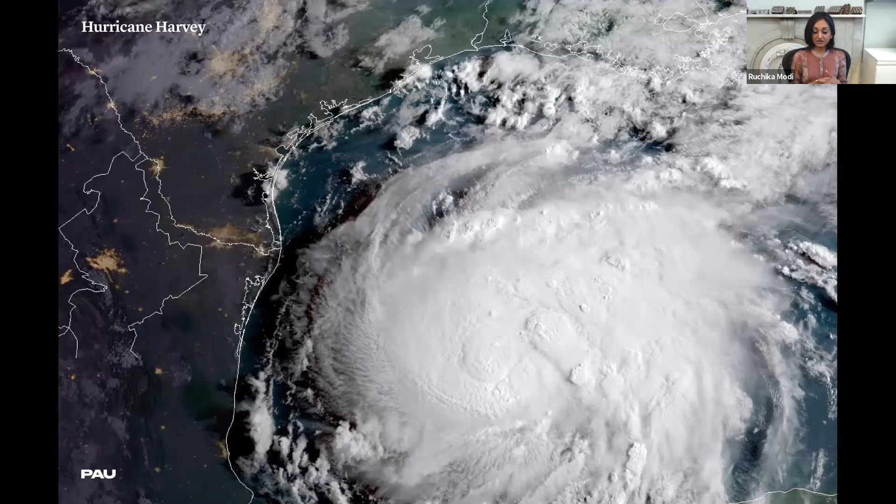Hurricane Harvey was a major storm with extensive rainfall, but it was not a natural disaster. The disaster was caused by planning decisions, or really a lack of planning, to allow for development to occur in a hurricane zone without taking appropriate measures.

Houston, the city with no limits, conveys the promise of boundless opportunity, but it's also the largest US city to have no zoning laws, which is part of a hands-off approach to urban planning that contributed to catastrophic flooding from Hurricane Harvey and left thousands of residents in harm's way.

According to environmentalists and experts in land use and natural disasters, growth that is virtually unchecked, including in flood-prone areas, diminished the land's already limited natural ability to absorb water. And the city's drainage system, a network of reservoirs, bayous, and as a last resort, roads that hold and drain water, was not designed to handle the massive storms that are now increasingly common.

They catastrophically failed to predict the way floodwaters would impact Houston's newest areas of exurban sprawl. In neighborhood after neighborhood, buildings outside the official floodplain but adjacent to water bodies were also inundated, in ways that could have been predicted with a more serious study of how sprawl has brought us to this point.

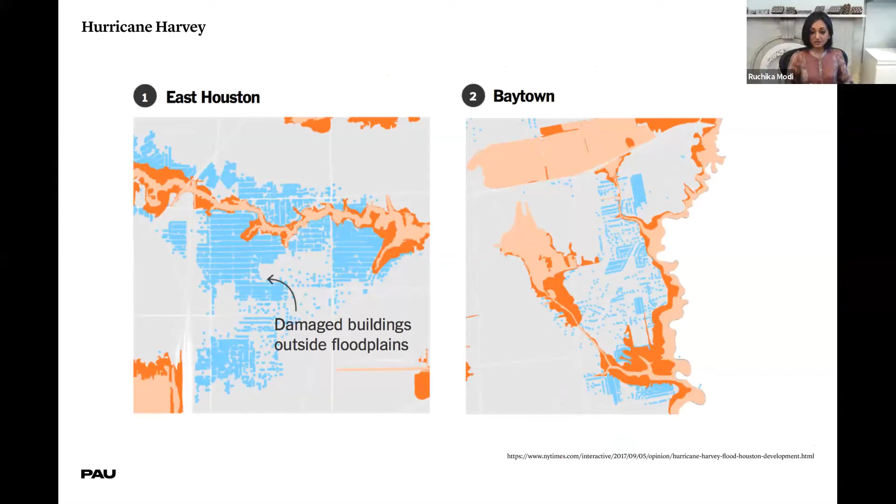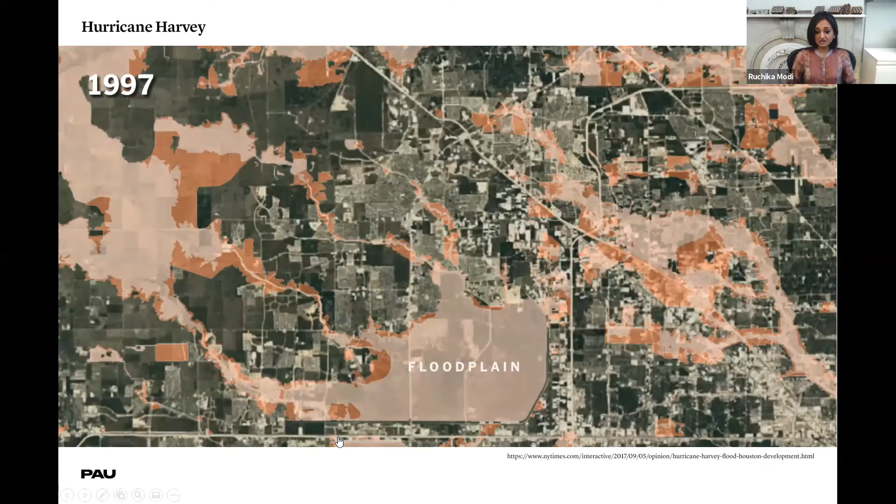This was not a process that happened overnight. This disaster was building in slow motion over the last two decades. Land far outside the city center that would historically not have been considered prime for development was devoured in pursuit of short-term profits. And it was these areas that proved to be some of the most vulnerable.

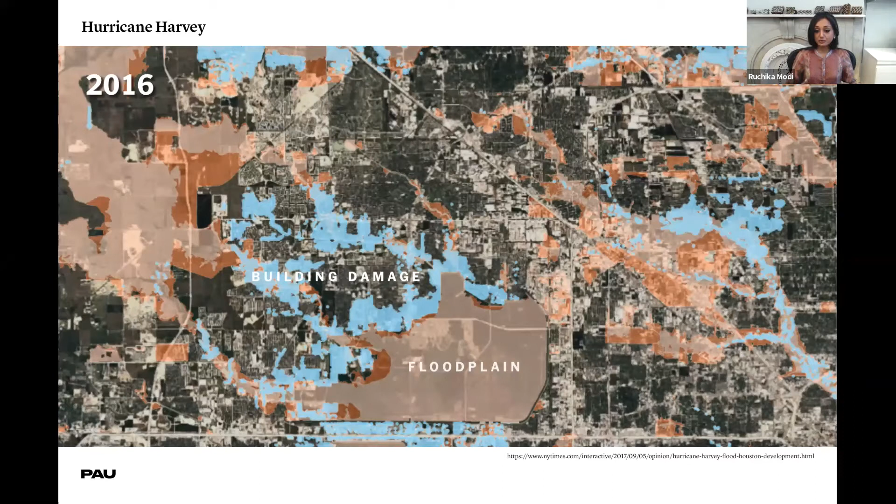So how can we fix this? From a policy perspective, addressing the relationship between climate change and the built environment would take more than band-aid solutions and cleaning up after the fact.

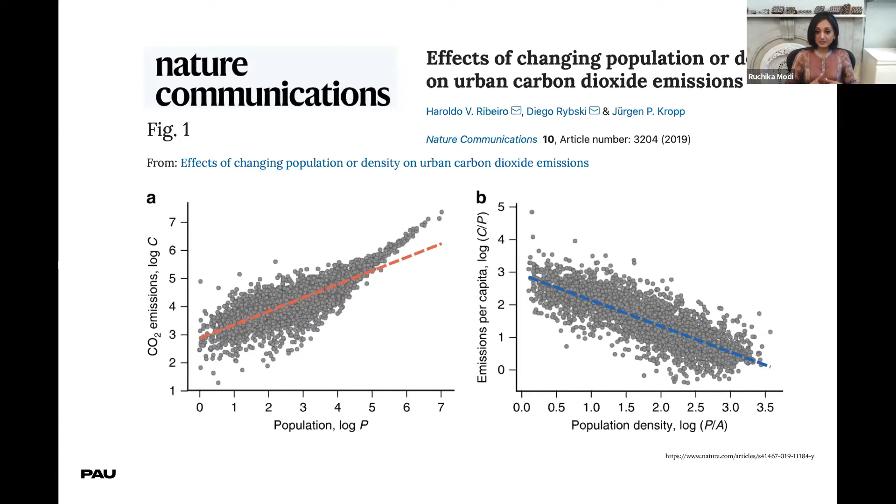One key component of this, of course, is density itself. Recent research has validated what proponents of cities have felt to be true for decades: that while cities themselves might be large sources of greenhouse gases, denser patterns of built fabric can allow people to live with a smaller carbon footprint per capita. We all know by now that the closer together we live on land that is suitable for human habitation, the better it is for the environment.

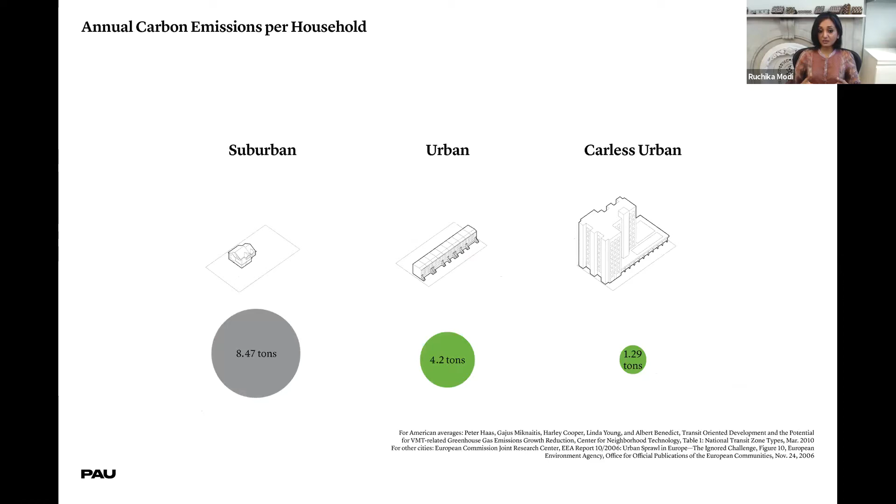And while urban areas generate 70% of the world's carbon dioxide, per capita is another matter, which also makes cities a good place to start making a difference.

Take Songdo, Korea, for instance, sometimes described as the world's smartest city. It's a top-down, $40 billion smart city project with wildly effective trash and recycling systems, an abundance of parks, over 20 million square feet of LEED certified space, and that's only just the beginning.

Yet in their attempt to design this high-tech city of the future, planners have ultimately created an incredibly lonely place to live. It feels more like a sparsely populated American 1970s suburb, just arranged in a grid. If you build it, they won't just come. Our cities need to be different. They need to be delightful and magnetic to hold a distinctive appeal for new green urbanites.

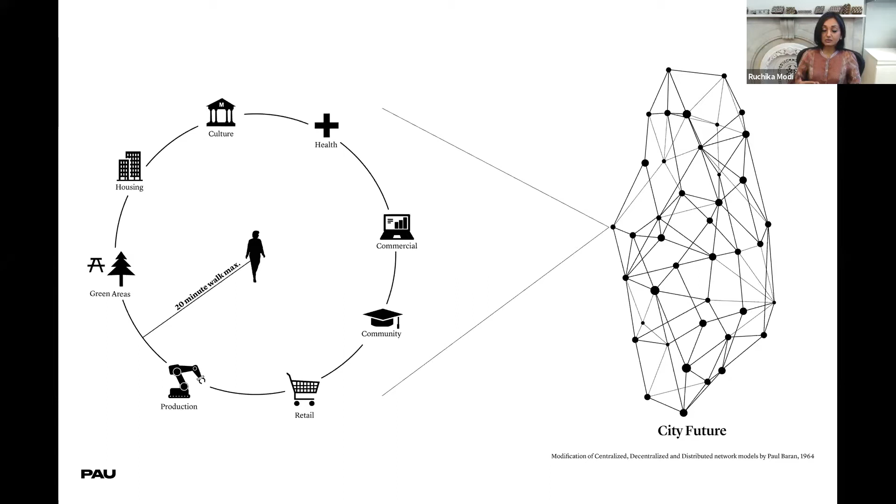In other words, placing density at the center of climate change mitigation strategy means not just doing the right thing in terms of cutting emissions, but truly offering tangible, immediate benefits as a selling point. Overall, increased density means more opportunities for walkable neighborhoods and car-free transit, which would in turn cut pollution, reduce congestion, reduce road fatalities, and improve health and general quality of life.

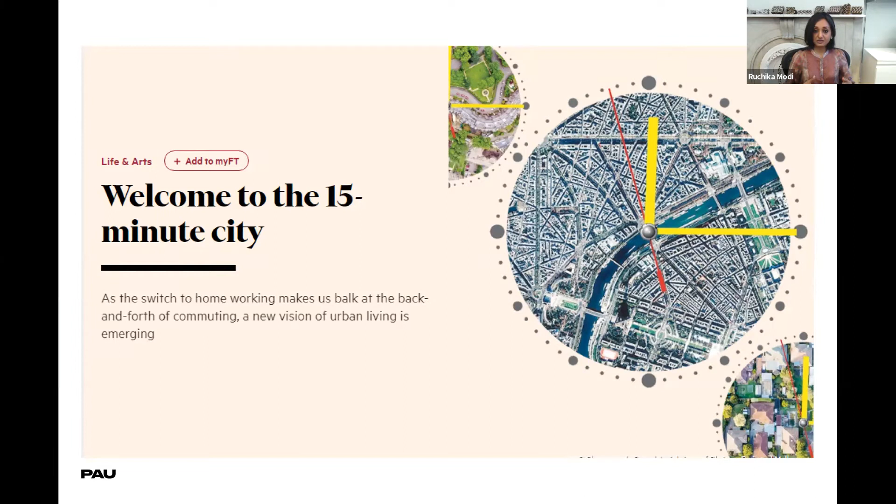And clearly this is an idea whose time has come. Paris Mayor Anne Hidalgo, one of our heroes, was influenced by it in her vigorous implementation of pedestrian and bike networks throughout the city. Meanwhile stateside, we're beginning to see political rumblings similarly addressing the need for better planning that has manifold outcomes from social to environmental.

A number of candidates in the 2020 Democratic primary recognized that access to affordable housing is equally tied to both racial and environmental justice. They made the previously esoteric policy connection between land use regulations and access to regional transportation, between economic well-being, social justice, and climate change.

And Biden's platform actually contains an impressive degree of specificity around how the federal government can wield both carrots and sticks to encourage municipalities to plan for growth in a way that's not just sustainable, but also equitable.

Which brings us to the currently empowered reactionary elements in this country, hopefully not for too long, the NIMBY in chief, who has resurrected segregation-era racial rhetoric about housing affordability, urban density, racial mixing, and home values that drove white flight, exclusionary zoning, and discriminatory lending practices over the last 70 years, which is quite ironic for a self-styled real estate mogul.

And then the supposedly libertarian right joins the president's blatant attempts to stoke white anxieties about integration, framing the issue as one of local control and personal choice to live in the suburbs. But this call for self-determination and liberty does little to hide appeals to a racist and xenophobic political base.

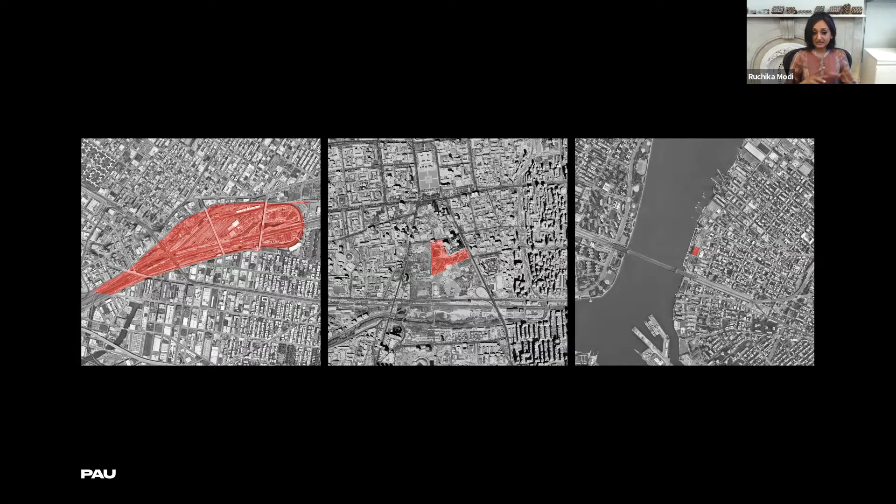Taken together, place, needs, connection forms its own paradigm, in that our society needs more connection and less polarization, perhaps now more than ever. I'll now take you through 3 projects at the scale of a city neighborhood, at the scale of a few city blocks, and at the scale of a building that illustrate this place-needs-connection approach. So let's begin with Sunnyside Yards.

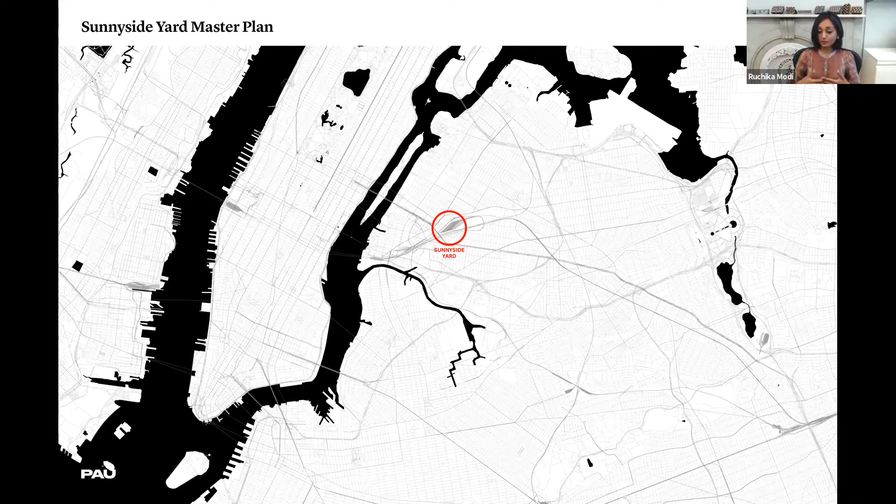Sunnyside Yard is currently a 180-acre active rail yard in Western Queens, about 10 minutes from Midtown Manhattan. It's a critical piece of regional rail infrastructure built in 1910, before the bridges, tunnels, and subways, and long before much of the surrounding neighborhoods. It's one of the busiest passenger rail yards in the country.

Amtrak, the majority landholder here, is in the process of upgrading the yard and wanted to make sure that the improvements would not preclude the opportunity for an overbuild down the line. So PAU was engaged by the city of New York to master plan a new neighborhood that could be built on a deck over this rail yard.

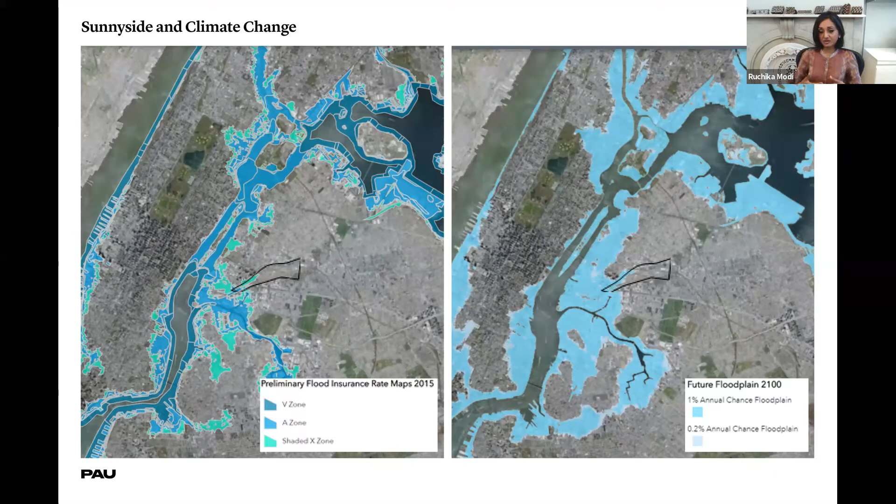The site is surrounded by some of Queens' most low-lying and therefore climate-vulnerable neighborhoods. So one critical planning priority from the very outset was to address this need, to mitigate risks due to climate change through public amenities and improved infrastructure, designed to withstand intensified weather in an area that's inside the floodplain. We also felt strongly that Sunnyside Yard must not just address this need for resiliency for itself, but also for its surrounding neighborhoods in Western Queens.

Because we need to deck over an active rail yard and maintain clearances for operations, this plan would create new elevated land that is largely outside future floodplains. It can also house public amenities and resources that can become community hubs in times of emergency, and decentralized infrastructure and resilient building systems designed for climate shocks can help ensure that these places remain functional.

It's not breaking news that New York needs more affordable housing. Sunnyside Yard presents the opportunity to co-locate affordable homes and high-quality open space, schools, libraries, and other public services.

This, along with improved access to transit, can help mitigate the disparities that currently exist. This combination of resiliency and equity can also help address the issue of so-called climate gentrification, where low-income populations are more exposed to risk because wealthier people can just afford to pay for added protection, like hiring private firefighters in LA, or affording homes outside flood zones that are increasingly in high demand, or affording healthcare as climate increasingly affects public health.

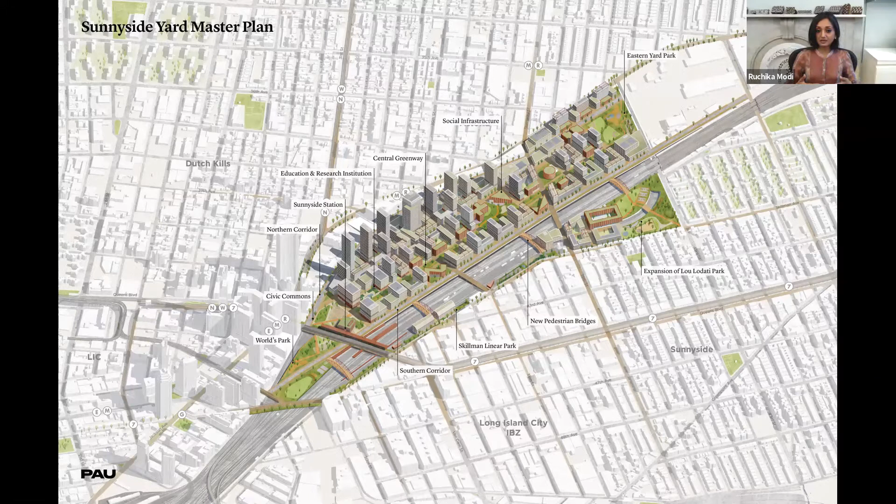However, in order to make sure that this framework actually locks in these benefits, it is critical that the plan be flexible enough to accommodate inevitable changes over many decades. All this is extremely expensive and difficult to execute.

The new neighborhood has to be constructed over a critical piece of functioning infrastructure that can only accommodate very limited partial downtime. The full build out of the yard could take upwards of a century, which is well beyond any reasonable demographic projection or likely guesses at the direction of technological progress. So creating a plan that could easily adapt when faced with these unknown unknowns was amongst our first principles.

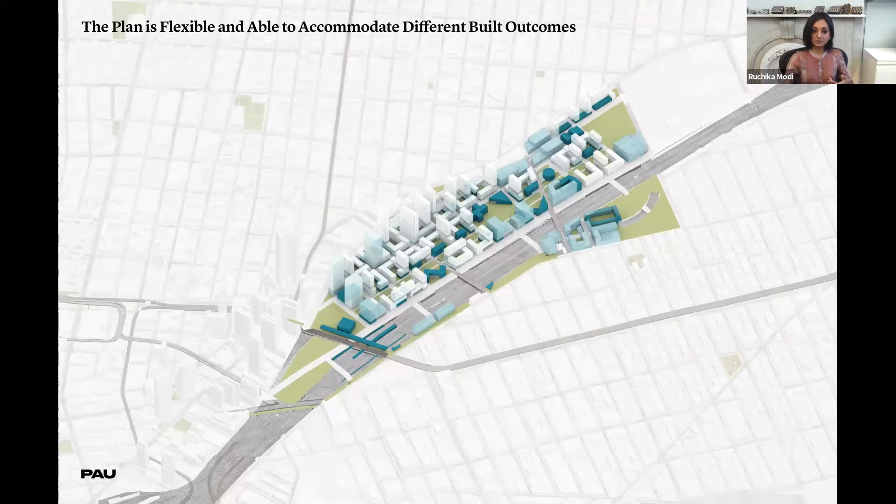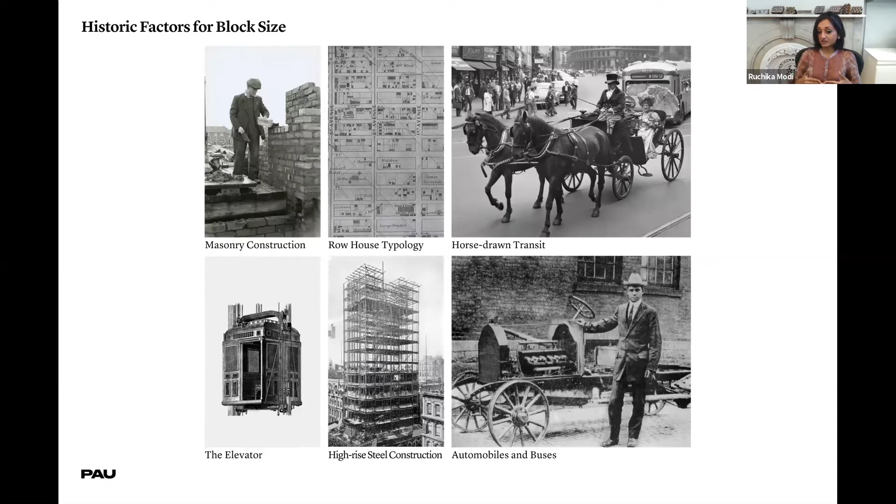To begin thinking about how this might work, we looked at how our cities were built during pre-industrial times and responded to pre-industrial constraints like masonry and timber construction, row house typology, horse-drawn carriages. These factors changed drastically with the Industrial Revolution, which gave us modern conveniences like the elevator, high-rise steel construction, the internal combustion engine. And ever since then, we've been trying to shoehorn post-industrial uses into pre-industrial blocks.

And of course, the drastic growth in population has made matters more dire. We went from about 910 million in 1800 to more than 7.7 billion today.

Smaller blocks like those in Portland seemed most able to deal with the changing building typologies because the general street grid provided light and air for buildings much larger than those initially anticipated. However, there's a rigidity to a plan that accommodates only one building per block that we wanted to avoid.

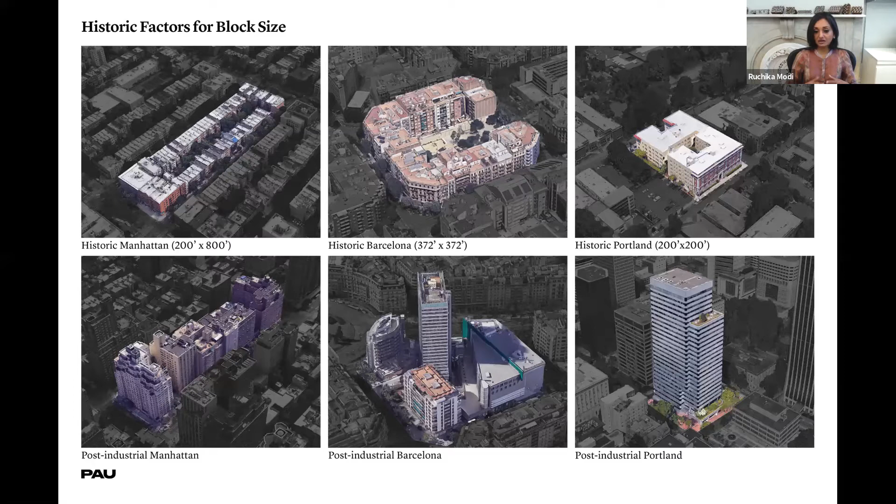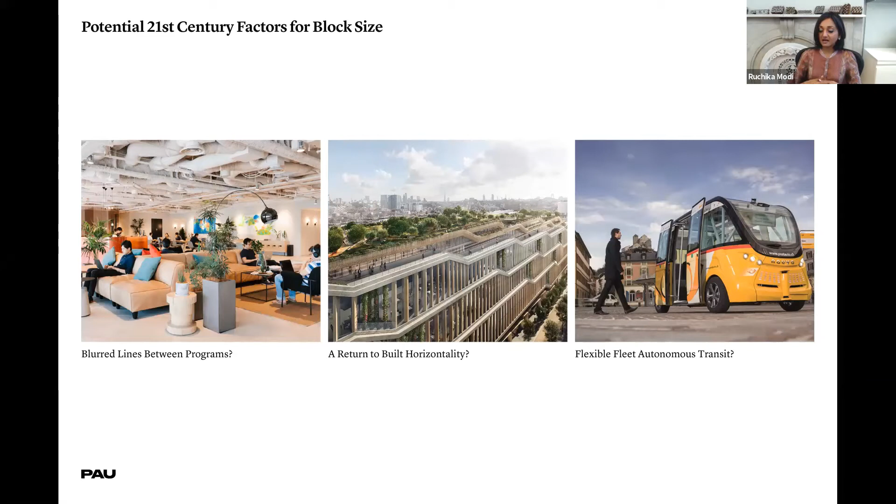We then began to think about the present paradigm shifts in urban program. The sharp dividing lines between uses that Jane Jacobs and her followers began to break down in the 60s are now getting even more blurred. These changes suggest a return to horizontality with buildings that have large flexible floor plates. There are also new advances in flexible and ad hoc modes of public transit that can adapt to changes in demand.

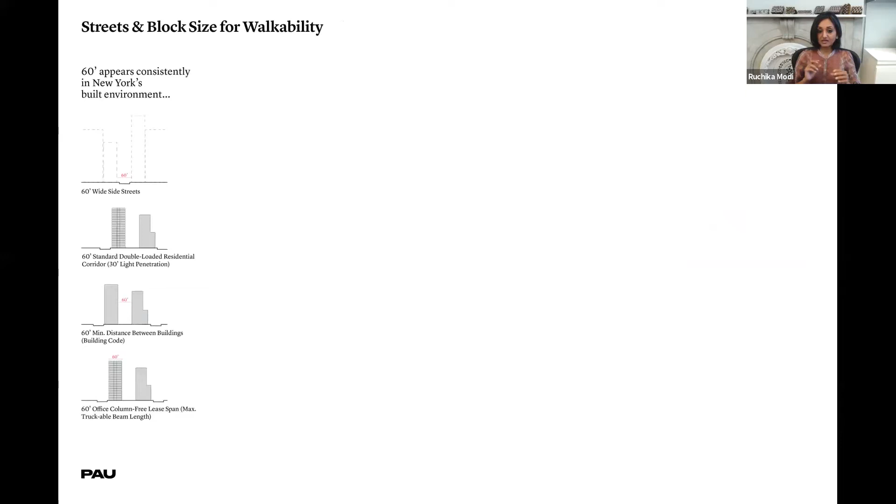Obviously, in addition to what's in flux, we focused on what is fixed. We all know what those are. And then through an iterative process with those needs in mind, we settled on a 60-foot grid module that could flexibly accommodate both building and street dimensions.

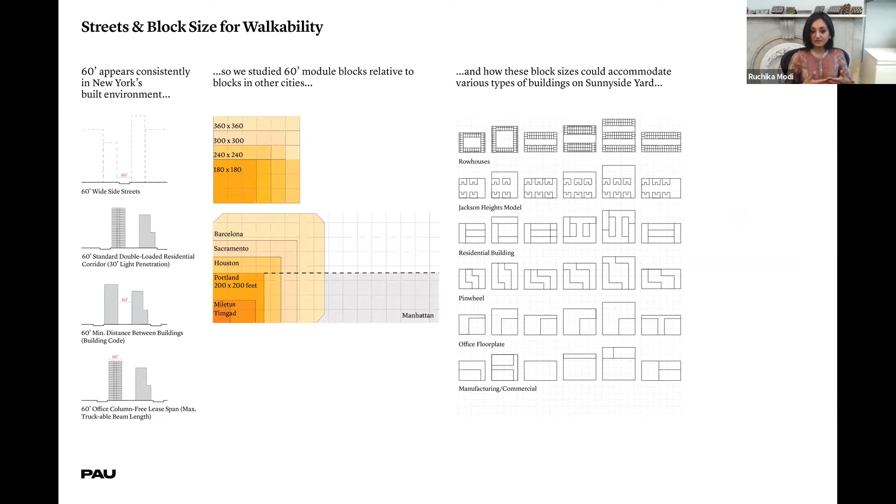And a typical block size of 240 by 240, which is small enough to enable pedestrian choice and some of the benefits of the Portland blocks, but large enough to allow for more options than point towers, giving more space for courtyard building types to breathe. Also, the choice of square blocks created a non-hierarchical grid, which when combined with the potential of joining blocks together for either open spaces or special programs, reinforced our goal of flexibility.

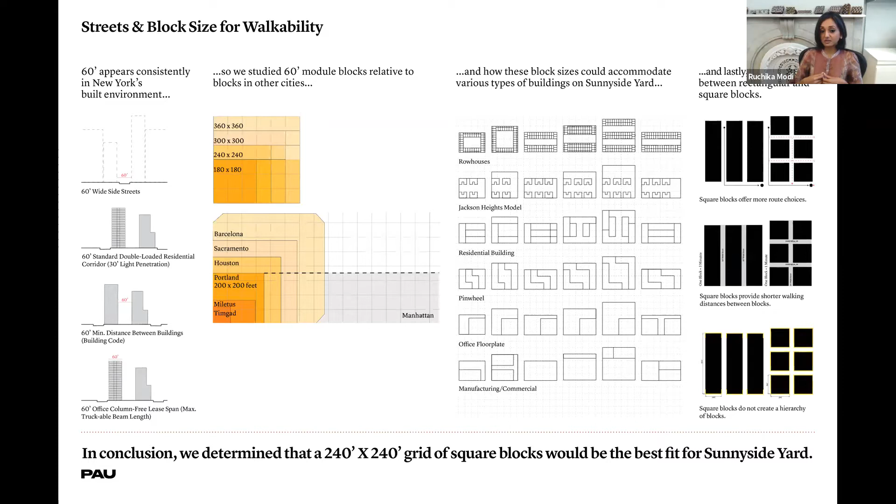This resulting grid is threaded between two arterial corridors, which connect to the 4 existing bridges that currently span the yard. The clearance requirements necessitated by the rail uses below meant that connecting grid to arterials to bridges was the most feasible way to create access to and from this new neighborhood.

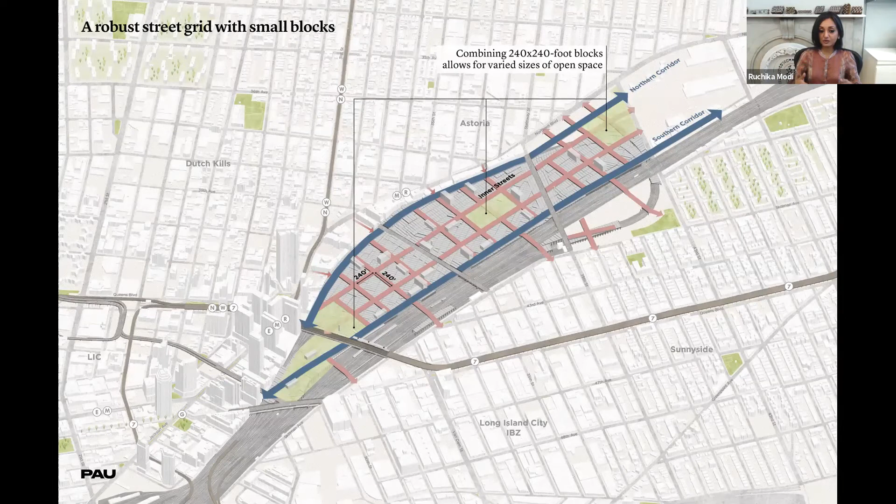And then at strategic points, as you see here, placed to facilitate transit access, the grade change between the surroundings and the deck could be bridged by new open spaces, new public open spaces defined by generous stairs and elevators.

And then at other points, like the new corridor would allow the existing building along the edge of the deck to construct new second floor entrances, navigating the grade change through the section of the building itself.

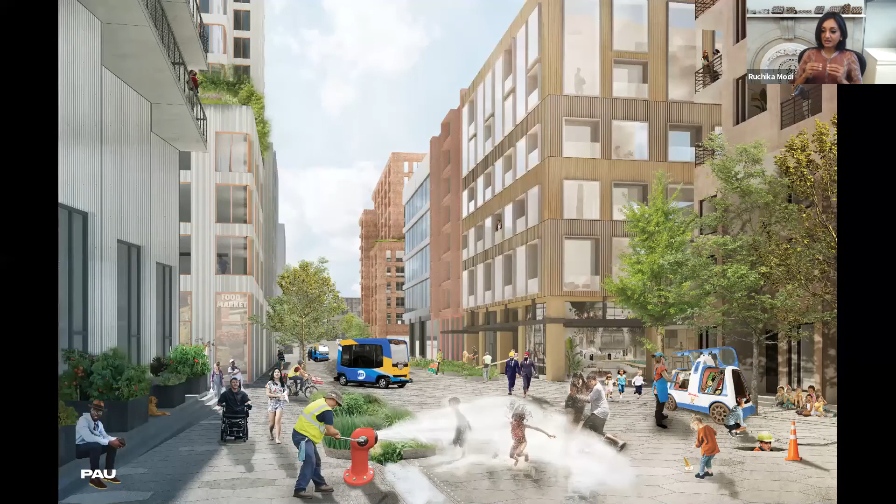Now with through traffic and access diverted to the edges, the urban fabric at the heart of the plan is free to be more focused on connections, on pedestrian and daily life. The possibility of limiting access to smaller public autonomous vehicles eliminates the need for curbs and for timed crossings, putting the priority on people.

We conducted a robust community engagement program as an integral part of the 2-year master planning process. This street grid became the armature that supported 6 key needs identified by the community. One of the 6 needs, not surprisingly, was a network of open space to serve one of New York's most underparked areas. This network facilitated connections both across the master plan and to the surrounding neighborhoods.

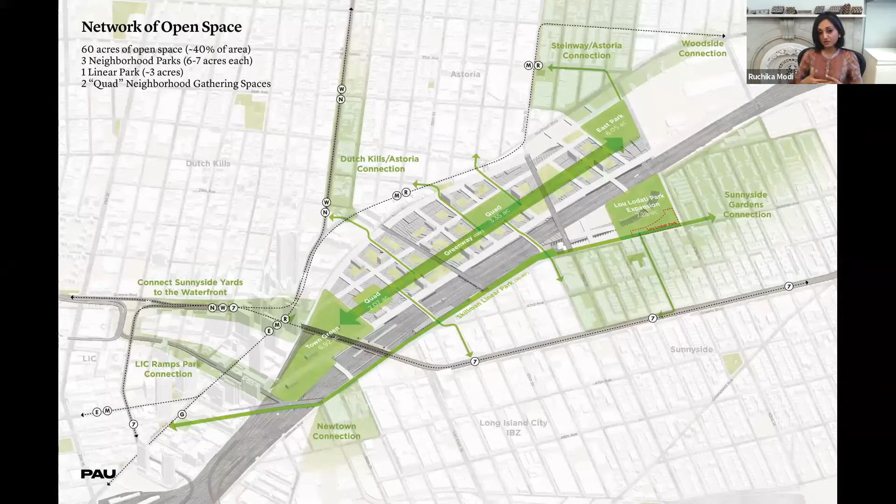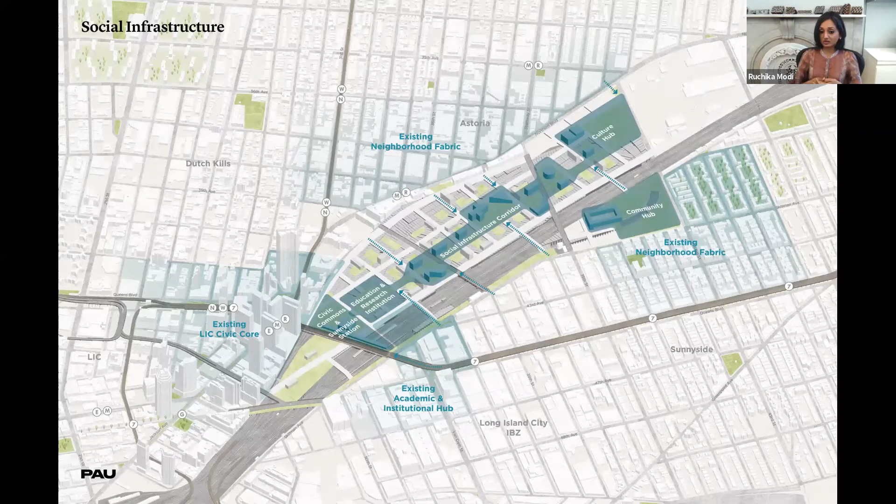A wide range of both active and passive open spaces were planned based on what we heard in our community outreach effort. This open space plan was then overlaid with a network of social infrastructure like schools, health clinics, and libraries.

These programs are arranged along the plan's central greenway. It's the spine that links all of the open spaces together to both address community needs, but also to activate the new parks, thereby creating spaces of connection between residents, workers, visitors, including those from the surrounding neighborhoods.

To ensure access to these new public goods and public space by a wide range of New Yorkers, as well as to support the proposed development, a multifaceted transportation strategy was designed, which includes street design that encourages walking, cycling, and other modes of micromobility, access points to facilitate connections to existing subway lines, and a new bus rapid transit route connecting Midtown to the Yards and onto the underserved parts of Queens to the south.

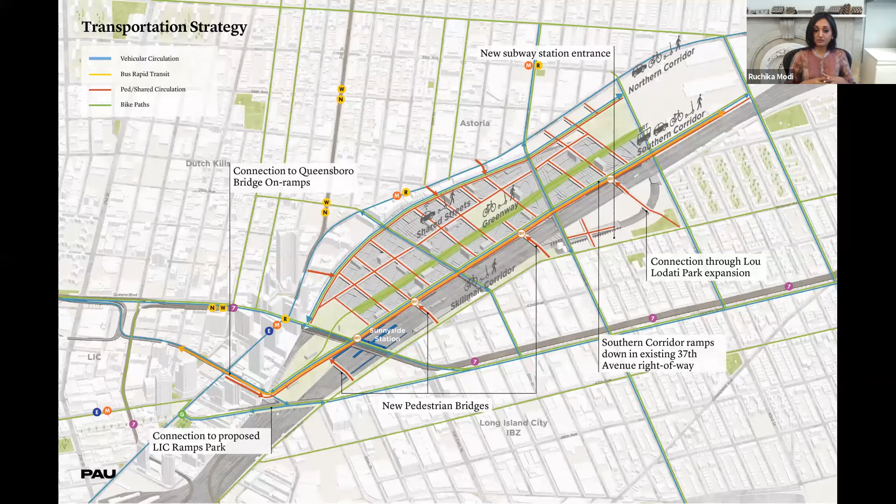And a multimodal Sunnyside station, which would connect all of the above to the wider regional rail network, including quick train-to-air train rides to all 3 of the region's major airports.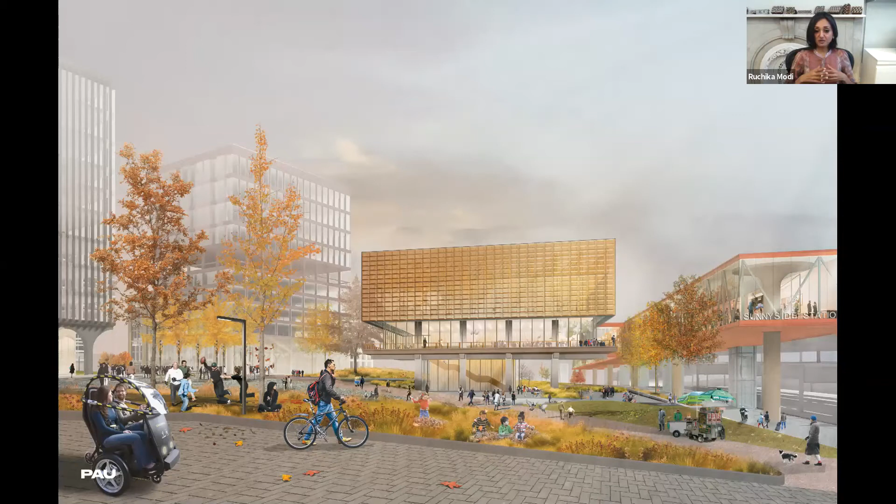Sunnyside Station was envisioned from the very beginning as more than just a station, with the potential to serve as a civic hub for the larger neighborhood, with a major entry plaza and cultural, retail, and co-working programs that would complement commuters, but also set up the station as a destination in its own right.

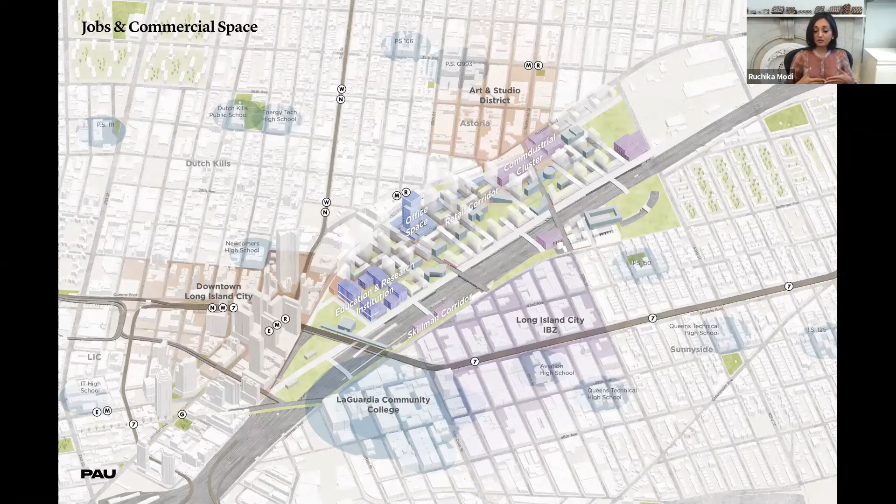There were commercial, light industrial, and institutional research space within the plan, creating connections to the existing industrial business zones nearby, and obviously downtown Long Island City. It also encourages walking commutes for residents and reverse commutes for workers from elsewhere in the city.

All of these other uses are surrounded by 100% affordable housing, which makes up the bulk of the proposed new built area, with a range of densities that respond to the character of the surrounding neighborhoods. As you can see, there's more density on the north than there is to the south.

Public transit access, and the sun path factored in. You'll see taller buildings near Long Island City and shorter buildings along the southern edge of the site, respecting the scale of Sunnyside Gardens, also allowing greater solar access in the planned open spaces.

While a certain minimum amount of density is critical to make the project both economically viable and urbanistically responsible, sensitivity to the distribution of density across the yard was critical in gaining support from the community.

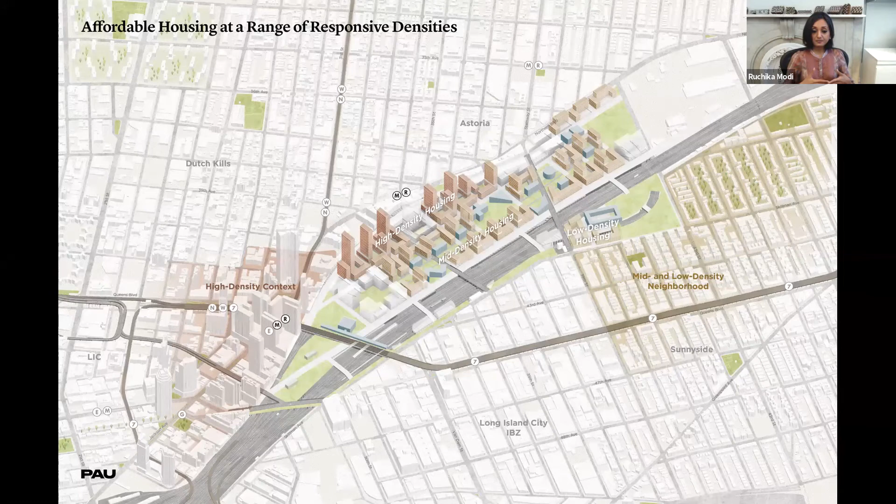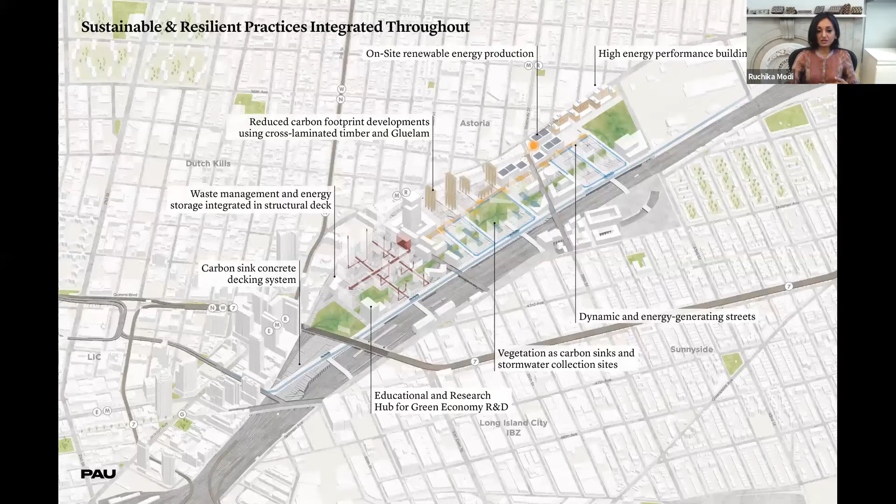The plan also anticipates the use of sustainable best practices throughout, but as I mentioned previously, these are not just an overlay of box-checking goals. For instance, the use of mass timber at the neighborhood scale could jumpstart a supply chain and trained labor force that makes the method more viable elsewhere in the city.

It acts as a mass carbon sink, storing 500 kilograms of CO2 per metric ton of timber used, and also decreases the loading requirements of the deck compared to other heavier materials like concrete or steel.

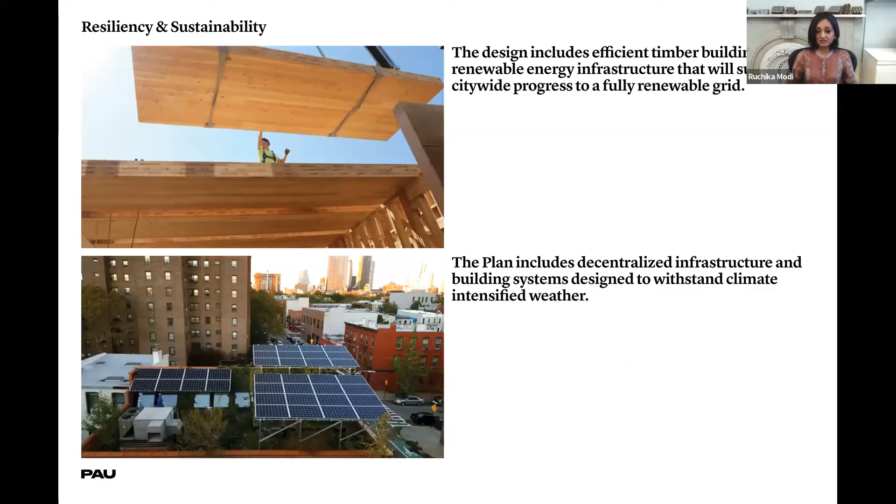The provision of more resilient, decentralized infrastructure to support all of the public goods in the plan makes Sunnyside Yard and all of its surrounding neighborhoods much more capable of dealing with climate change.

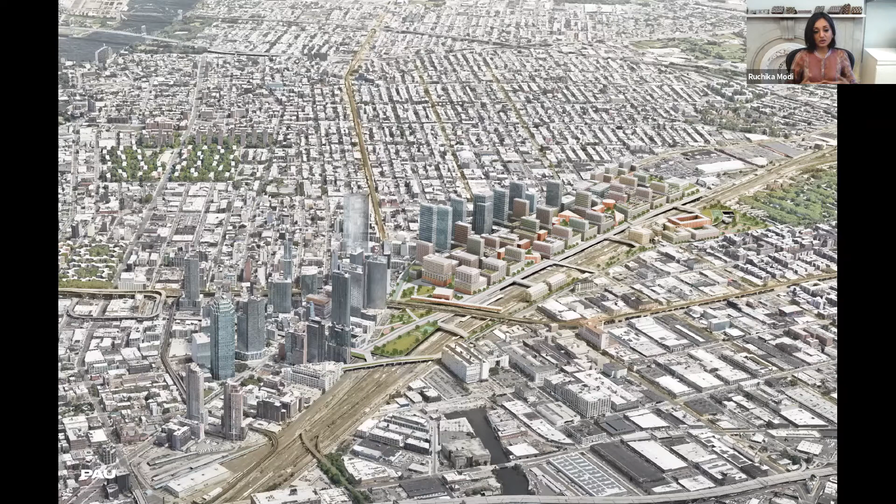The area is also made accessible to a wider population through the provision of affordable housing and transit infrastructure, so that more people will be both more secure during catastrophic events and better able to live smaller footprint lives on a day-to-day basis. This is precisely what we mean by density and thoughtful, forward-thinking planning, addressing local needs holistically alongside the urgent need for climate action.

Now let's jump from Queens to Ulaanbaatar, Mongolia, the coldest capital in the world, with a population of just over 1.5 million, which is about half of the country's overall population. The Soviet-era planners designed the city for no more than 600,000 people.

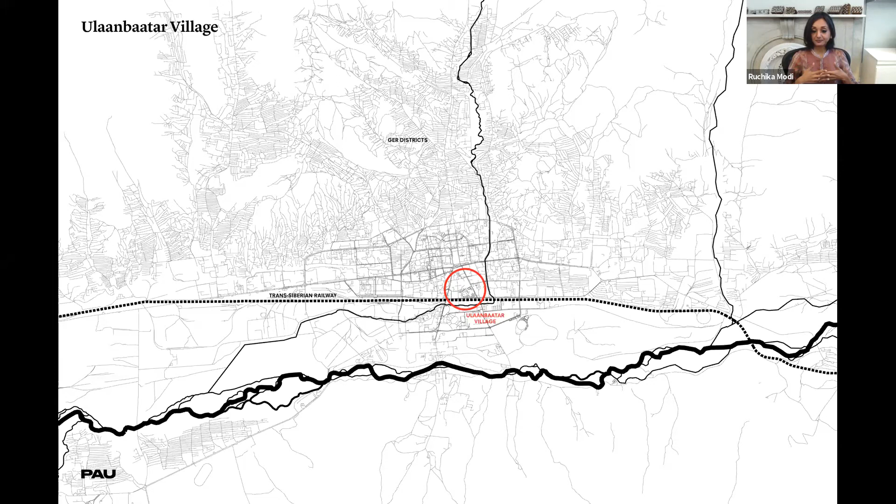These districts have little to no urban infrastructure, no heat, no sanitation. They typically burn coal or sometimes trash to keep warm. And then the residents commute to the city's central business district daily in their gas-guzzling SUVs, leaving the city at a standstill during commute hours, with gridlock being a daily reality.

And I don't need to spell out what this means in terms of pollution, in terms of public health, climate resiliency, and just general quality of life. So while the city might be dense in its current state, it is unsustainable.

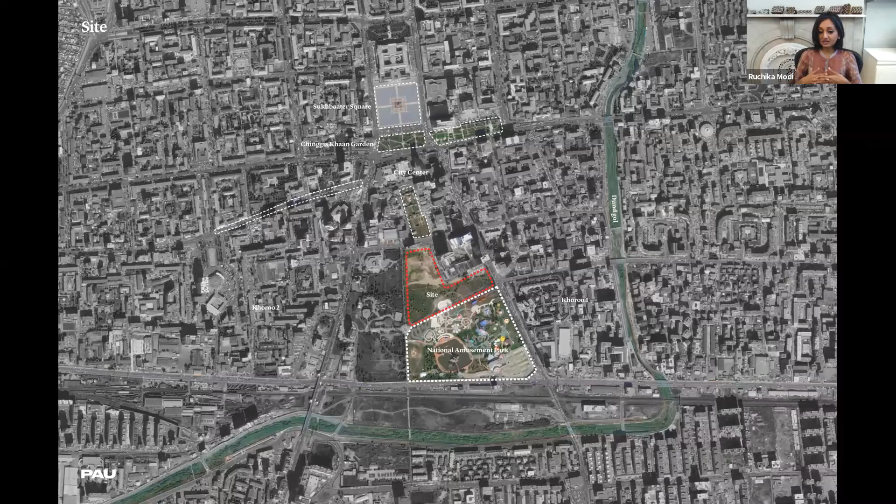PAU has been commissioned to design a roughly 500,000 square foot mixed use neighborhood or village, as our client calls it, in the heart of the city. This is the densest part of the city. Our site is owned by the National Amusement Park, a Soviet legacy, and sits directly adjacent to the park and minutes from the main civic square.

This was our initial parti diagram that illustrates the concept of an urban nomad that very much stems from the notion of place needs connection, as I previously described. We asserted that to be a city dweller is also to be a nomad, as in the tradition of the flaneur, and that at their best, both urban and rural lifestyles center on freedom, on autonomy, and on self-determination.

So cities, when designed well, allow the same independence that nature provides, the ability to roam, to explore, to both lose and rediscover yourself. And it was this sketch that actually won us the commission, and eventually turned into this site massing.

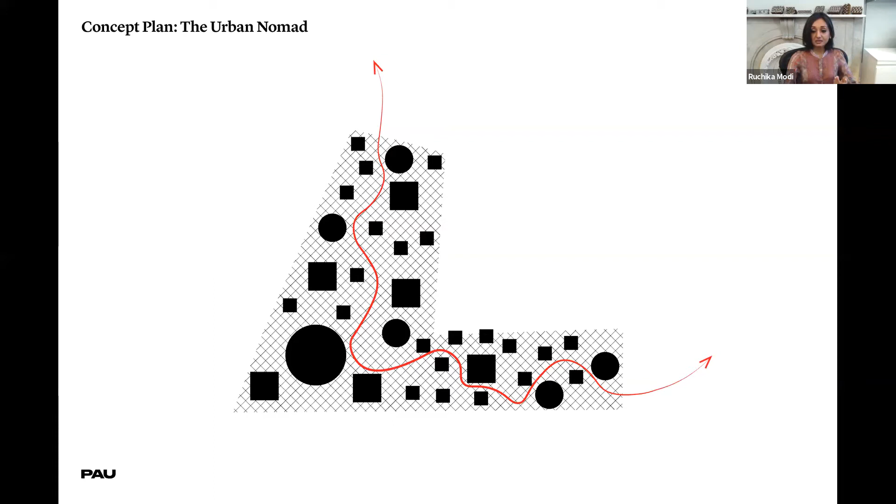So the project is truly a mixed-use, walkable city center from live-work lofts and local retail, each at about 30% of the total gross area, office at about 15%, and then the remainder comprised of restaurants, a nightclub, a folk art theater, indoor playground, and even a haunted house.

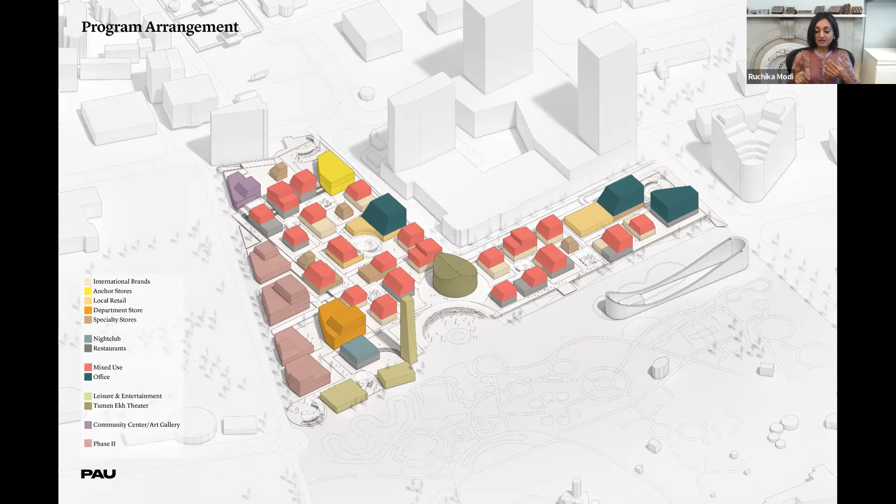When we took on this commission, we had no idea that we would end up designing 41 buildings. That large development you see rendered in white to our immediate northeast is this. It's a hotel and shopping mall, sadly representative of most new development in the city. And I would argue completely devoid of any sense of place, no matter how much it might align with sustainable design practices.

We, on the other hand, turned to what is quintessentially Mongolian, the stunning landscape, the flora and fauna, the big blue skies, what the people really hold most dear, and used that as our inspiration for the material palette. Again, rooted in place, rooted in connection.

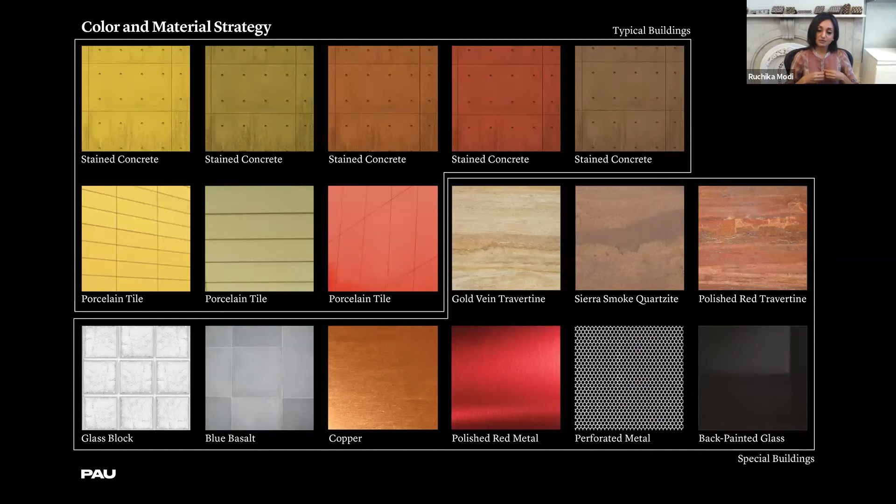The landscape also inspired our form studies as the undulating angled rooftops echo the majestic mountains nearby. And then combine these form studies with the mixed-use program, and you'll arrive at this catalog of buildings.

The majority that we classify as typical buildings are about 2 to 3 stories of live-work lofts with retail below. The special public program buildings are all unique. They all respond to specific needs, but belong to the same mountain range, formally speaking.

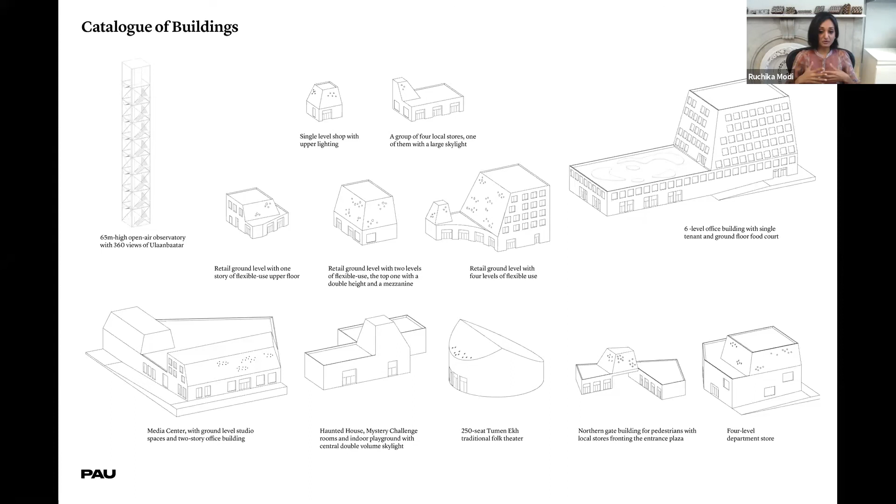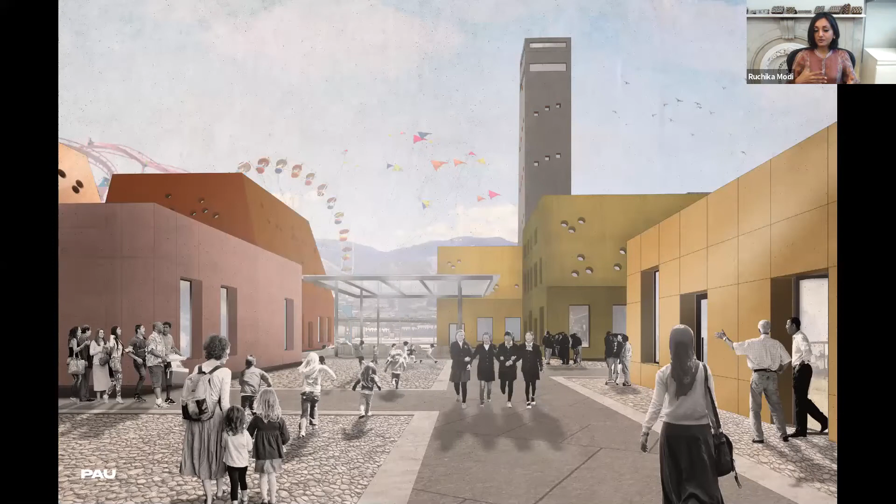The result, we think, is a modern urban neighborhood that looks to the city's past and future needs, while also connecting with Mongolia's rich history and beautiful landscape, wherein people are encouraged to stroll through and around the buildings, to linger or pass through the plazas, in multiple meandering paths of movement and repose, enjoying the key ideals of both urban and nomadic life, autonomy and discovery.

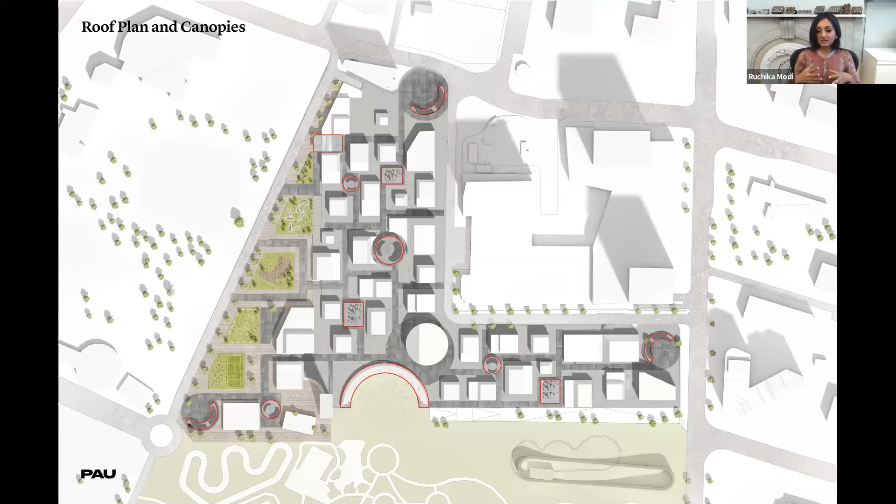We broke away from the traditional building typologies that are designed to control the pedestrian, and instead offer a non-linear, non-gridded site plan, which is interrupted by a network of outdoor spaces that we refer to as campfire moments. This is a series of public plazas that are flexibly designed to serve as places of repose or as sites for more organized retail or entertainment.

This one is located in the liminal zone between the village and the amusement park and bonds the two together spatially and programmatically. So the village responds to its natural surroundings in a multitude of ways. From a practical standpoint, the layout of buildings with respect to the plazas modulate solar exposure as needed and provide wind shielding when necessary.

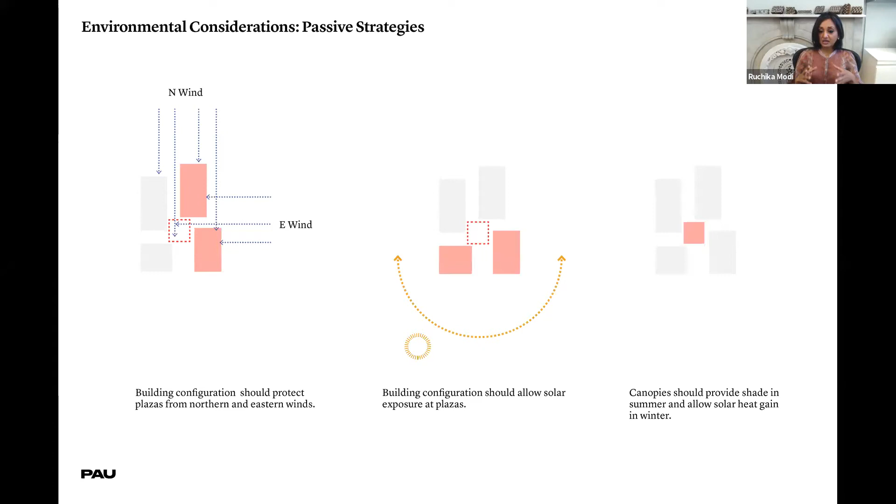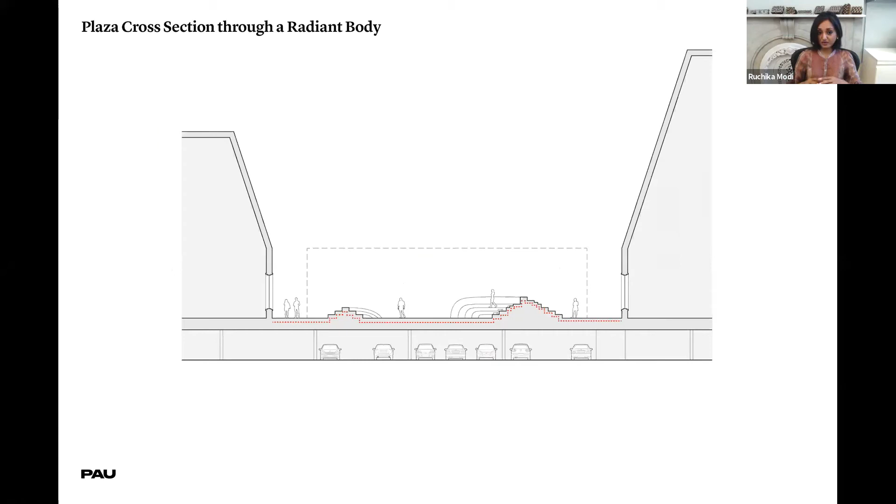This, combined with radiantly heated urban furniture in the plazas, extends the use of outdoor spaces to the shoulder seasons, a feature that comes in direct response to the needs of a people that much prefer outdoor living. The shape of the roofs and the size and location of windows maximizes daylight while minimizing heat loss. And the exterior wall construction is designed to provide thermal mass appropriate for the climate, obviating the need for air conditioning in the live-work lofts.

I was there in the summer and it gets really hot.

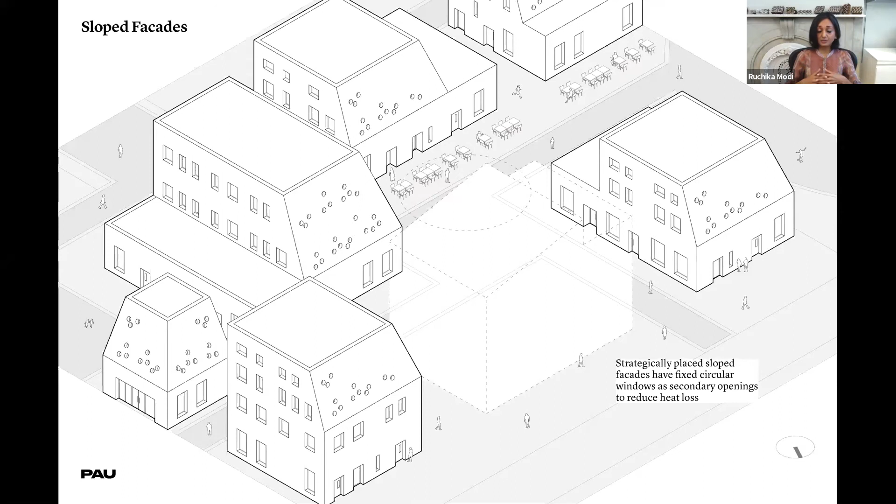Through thoughtful design and the use of local materials and construction methods, we think that the village not only invests in the needs and ways of life of its residents, but also helps a country searching for its modern identity shape a way of living sustainably without losing what makes it unique.

And the last project I'll show you, we're now back to New York, this time the Brooklyn Waterfront. The Brooklyn skyline pictured here has long been dominated by the Domino Sugar Refinery, an industrial urban landmark constructed by Henry Havemeyer in the 1880s. In 2004, the operation moved to the Bronx, leaving the once vibrant working waterfront vacant.

In 2017, PAU started the design for its adaptive reuse, returning the building to life as the nerve center of a new working waterfront, but transformed to meet the needs of the 21st century as a mixed-use neighborhood.

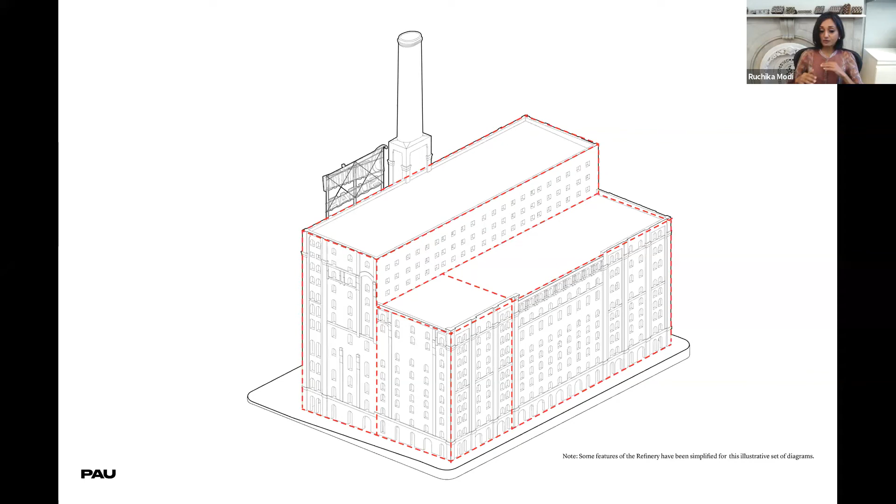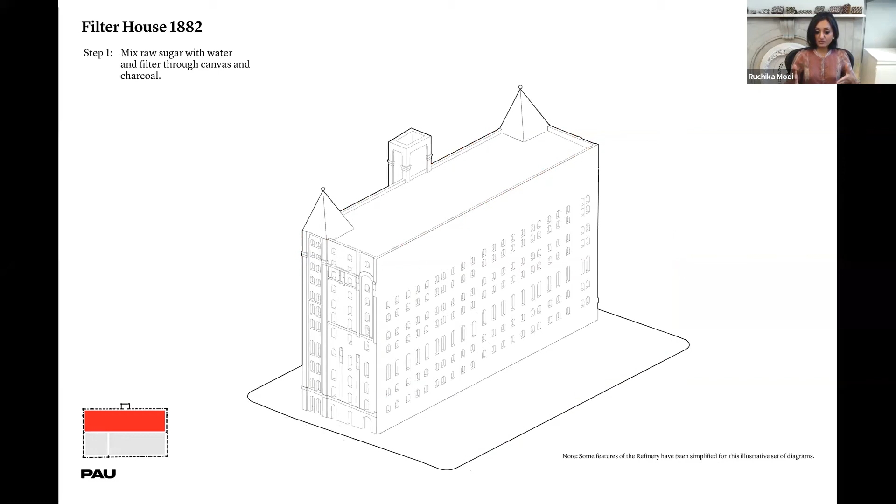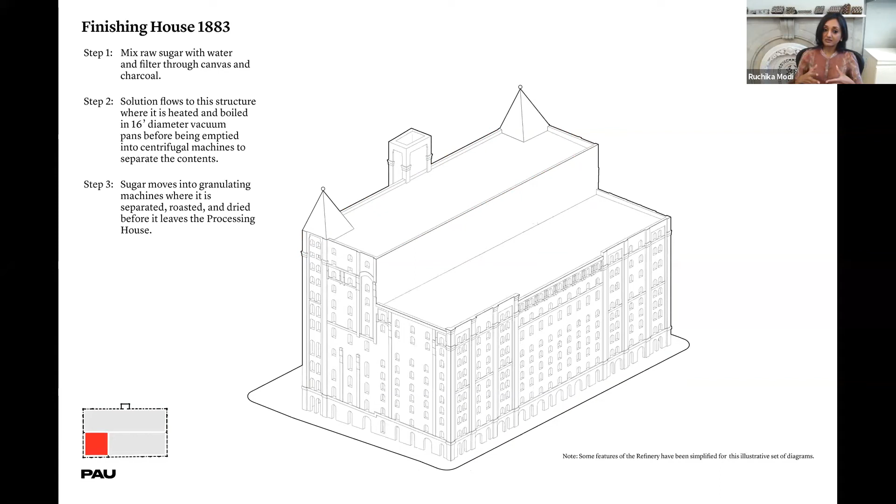The original structure was built to consolidate three functions inside three conjoined buildings. Although the floors and windows across the three buildings are completely misaligned, together they give the entire structure a singular monumental appearance. First came the filter house, where the raw sugar solution was filtered. Then the pan house, containing the giant pans for boiling and separating the solution. And finally the finishing house, where the grains of sugar were separated, roasted, and dried.

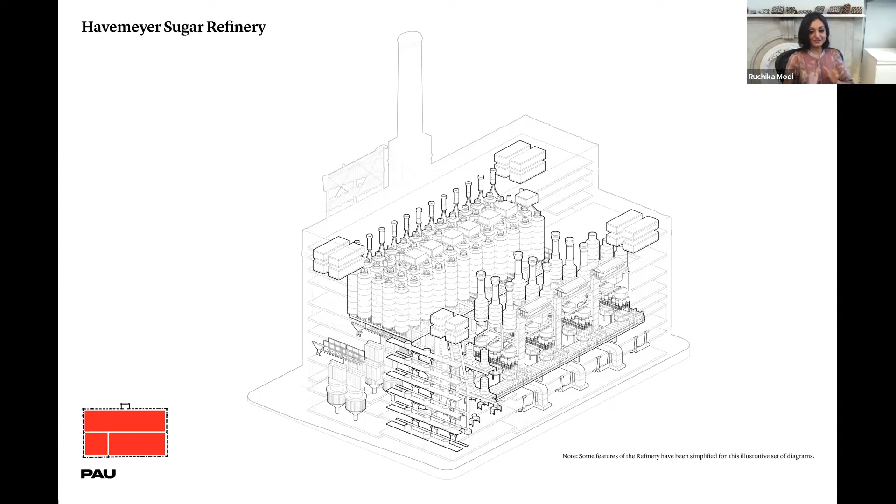The process required enormous equipment housed in cavernous multi-story spaces, purposefully obscured by the repetitive punched arch openings in the masonry. We had a lot of fun creating this drawing based on old photographs and what we could glean from the little that remained, and the rest was filled in by our vivid imagination—so there's some creative license there.

So this is what it looks like on the inside: small windows and deep floor plates, not quite suited to the stringent light and air needs of a modern day workplace. Our initial parti sketch was the idea of nesting a brand new building within the existing envelope to create a unique dialogue between the old and the new, addressing the two issues just described—the misaligned windows and floors across the four facades, a constraint imposed by place, and the need for light and air, a design driver imposed by needs.

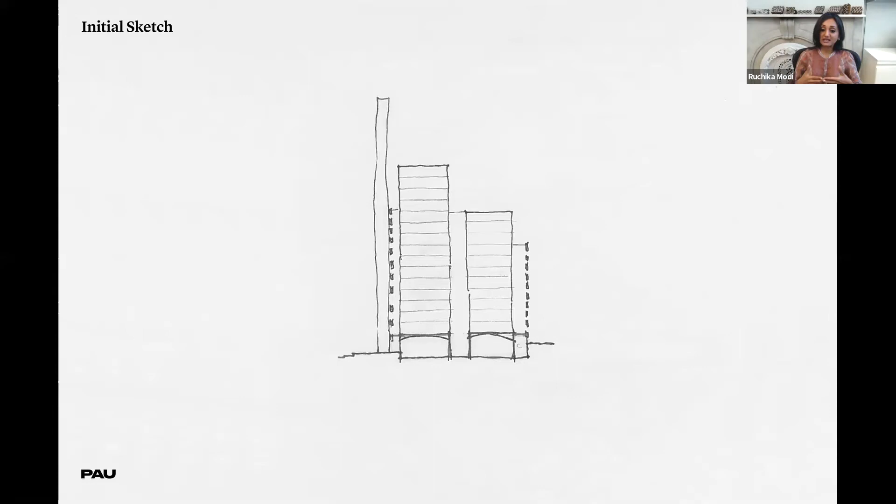By pulling back from the original walls, we could preserve, but literally bypass, the idiosyncrasies of the existing historic structure, and also achieve ideal and standardized floor heights, creating office space designed to meet the needs of the 21st century worker, not machinery.

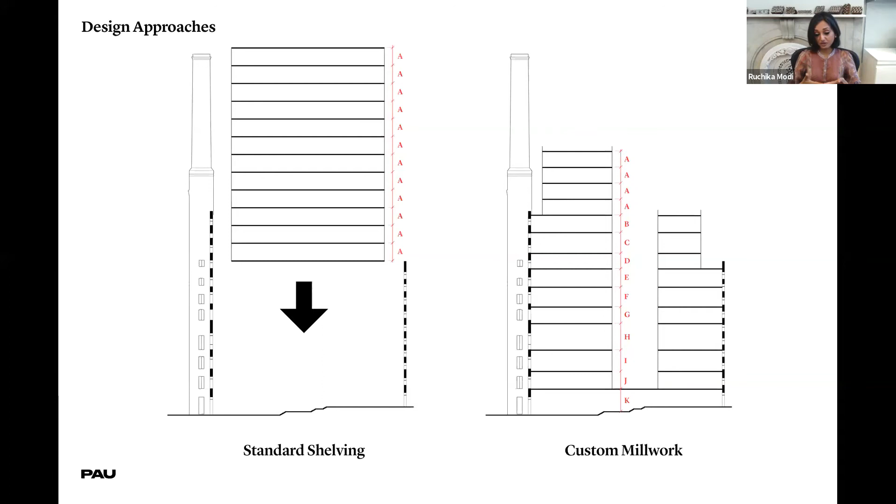Having arrived at our initial parti, we immediately commissioned a photon analysis to test our belief that this light and airy perimeter would enhance natural light penetration to the core—and it turned out it did. The study also helped us arrive at the optimal dimensions for the gap, which is about 10 to 12 feet.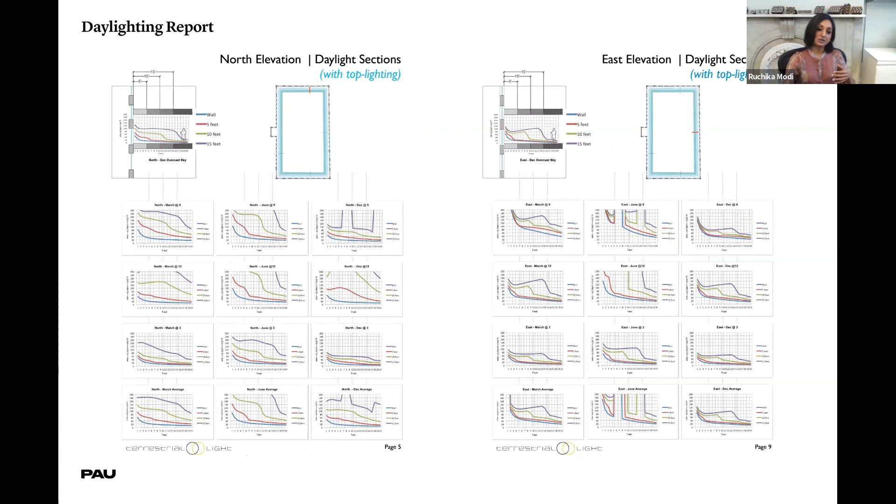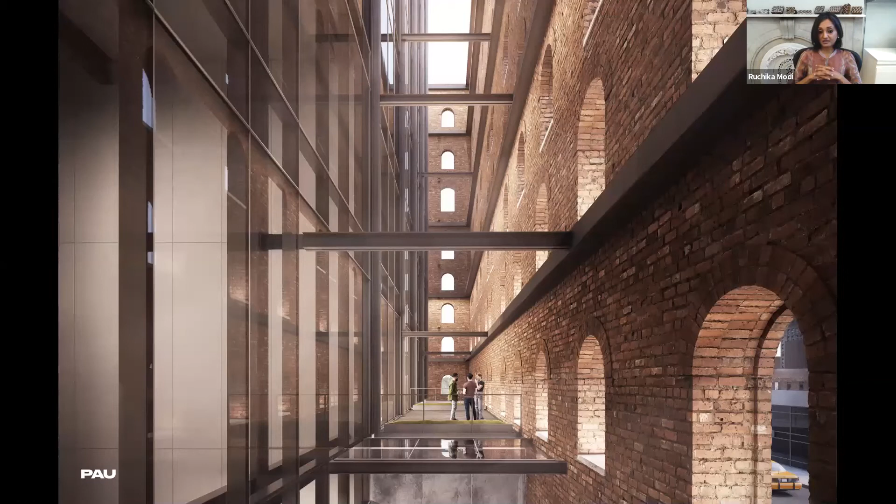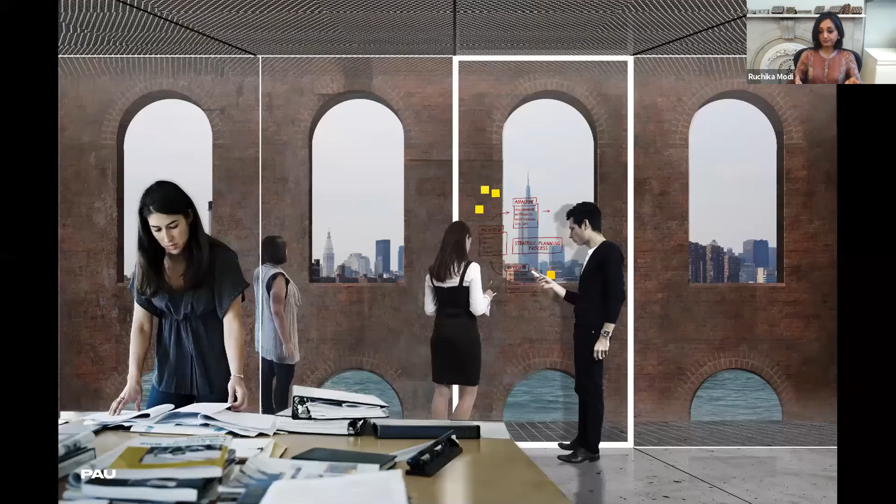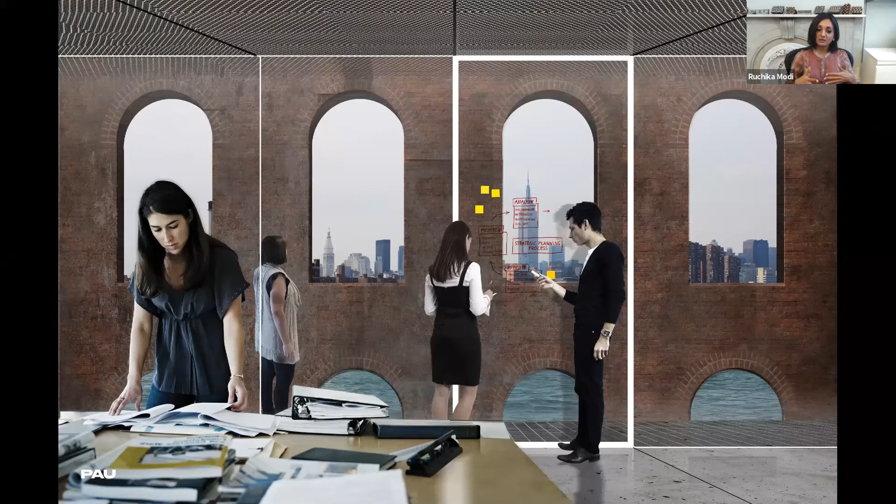A view from the inside out: the array of historic windows, uninterrupted by any interior partitions, reveal expansive views of Manhattan. And while the view might be punctuated by the existing window openings, your mind's eye completes the vista.

So now that we'd arrived at a parti for the building approach, the next big question for us was, what form should this building take? These are models, just a few of them that we tried on for size.

But we kept returning to the quintessential industrial archetype, the barrel vault, not just for its pragmatics, long spans, the flexibility afforded by column-free interiors, but more importantly, for its resonance with the refinery building, which has been classified by preservationists as the American round arch style.

So the initial parti sketch evolved into this. We feel that the two together, the masonry envelope and the barrel vault, form a dialectic, a connection such that the whole is greater than the sum of its parts.

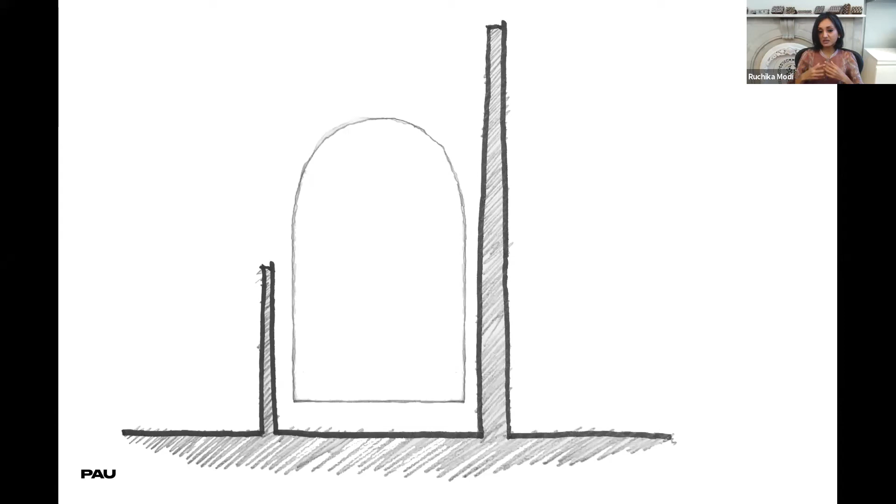And the sketch further evolved into this building cross-section. You can see here the curtain wall held back and the superstructure extending through it to brace the masonry, which, by the way, is a very tricky knife plate detail.

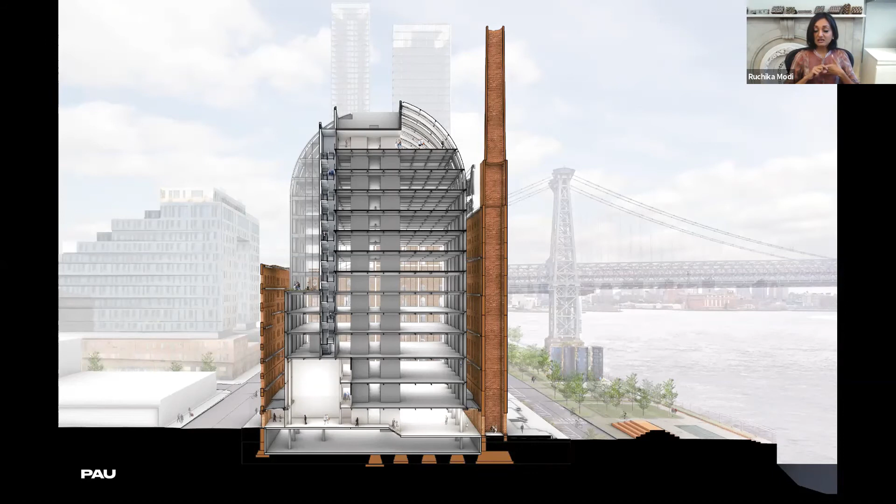Two other benefits emerged from this approach. The new building foundations don't disrupt the existing foundations of the existing masonry, which would have severely complicated construction. And we were able to recess the mechanical penthouse within the barrel vault right above the core so that none of it is visible from any angle. And we all know that doesn't happen too often.

So the result is a state-of-the-art, about 430,000 square foot workspace housed within a beautiful idiosyncratic urban artifact that is unique to post-industrial Williamsburg and offers a singular experience for its inhabitants and the larger community alike.

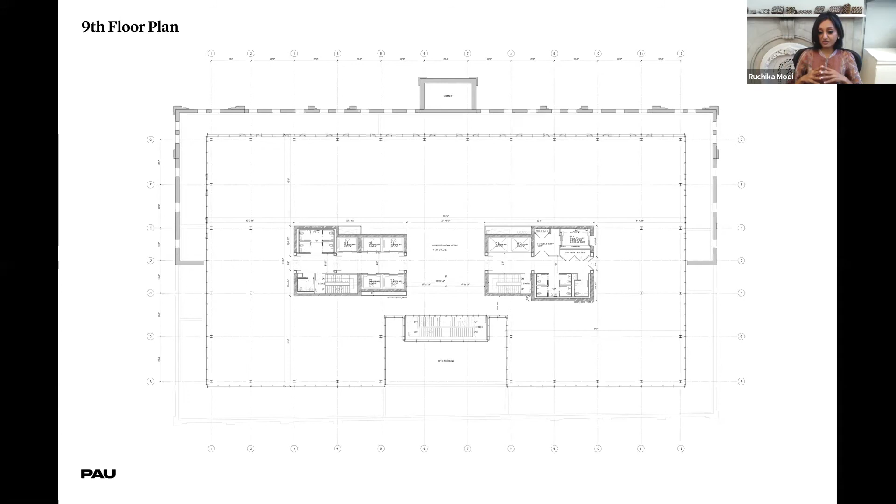This is a typical office floor plan designed to work for both single tenants and easily demised for multi-tenants. That consolidated split center core looks deceptively simple. We worked on it for ages with our client, Two Trees Management, in order to get it right. It serves a multitude of needs in a very tight and efficient footprint so that we could achieve the desired lease spans.

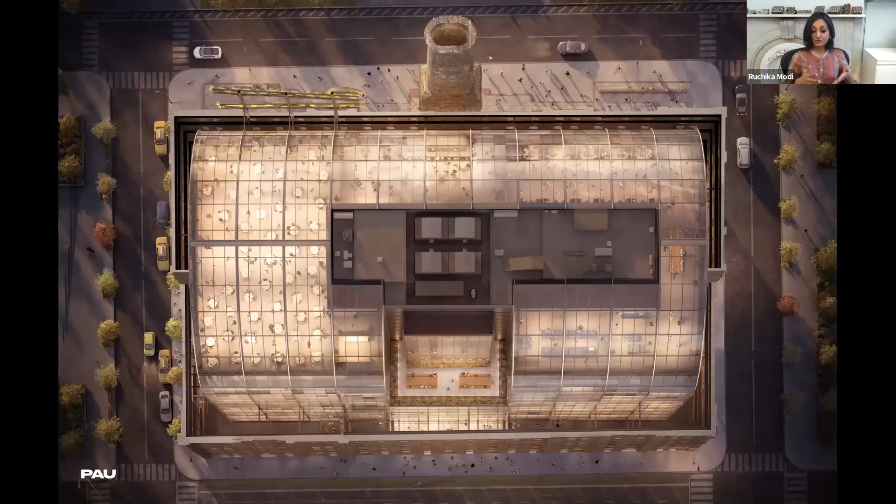A bird's eye view shows the sunken mechanical penthouse hovering over the penthouse floor, which most likely will be devoted to more public uses rather than office space.

We just went through a design assist process with the curtain wall contractor and completed the CDs. The barrel vault curtain wall system is a steel ladder frame assembled and pre-glazed in the shop with hot bent IGUs as a 4-unit wide mega panel, and it's lifted into place, which helps control quality and eases construction logistics and budget.

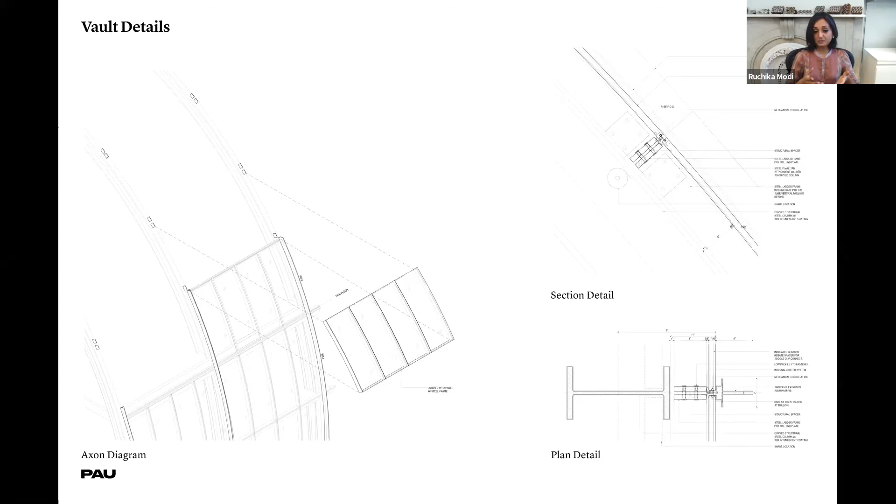So zooming out, the refinery sits in the center of a new waterfront park, and it's intended to be the crown jewel of this new mixed-use neighborhood with creative office space, market rate and affordable housing, neighborhood retail, and community facilities. The conversion of the refinery to office space, and not condos as was once considered, helps enable that 15-minute city for a neighborhood that has seen an abundance of residential development in past decades.

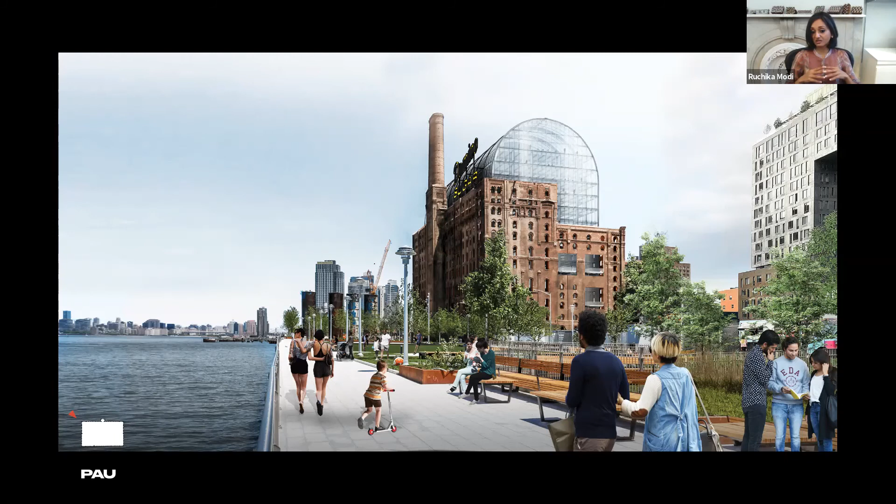So one of our goals was to enable a seamless public connection from the neighborhood to the stunning quarter-mile long waterfront Domino Park. And to that end, we created this drawing, which is a riff on a Nolli plan, to understand and document the accessibility and flow of public space within and through the building.

As we all know, office buildings are hermetically sealed for all kinds of reasons. The public is usually not welcome. Our client has a very different attitude and encouraged a radical departure from the norm.

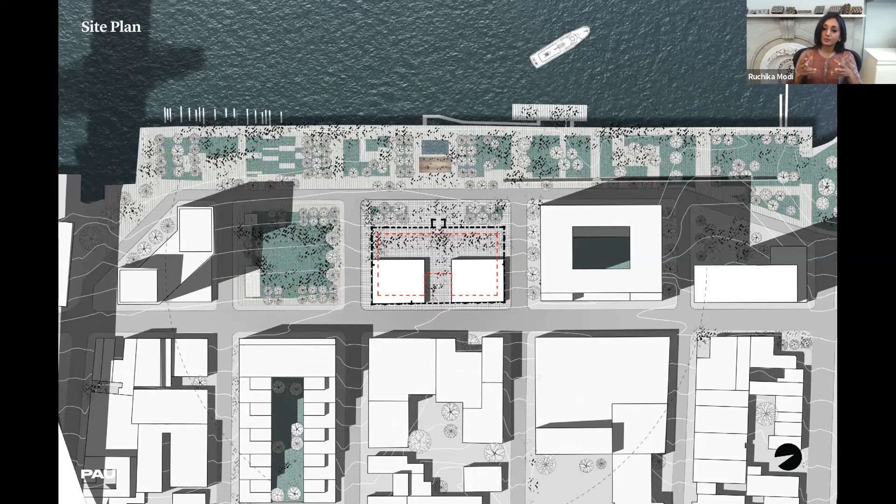We see the ground floor as a public vestibule for the park, an accessible threshold between neighborhood and waterfront. So one could enter the building on the city side and walk right through to the park. The program of the ground floor too will complement outdoor recreational uses.

And then finally, a drawing we created for the Landmarks Preservation Commission to illustrate this concept of public access. We propose transforming all the windows to doors to create this porous enfilade that welcomes the public in.

So this is where office tenants meet eyeball to eyeball with neighborhood residents, meet with park goers from across the city, meet with tourists. And because we believe that every act of architecture is also an act of urbanism, this place of connection can actually have a tangible impact on the city around it.

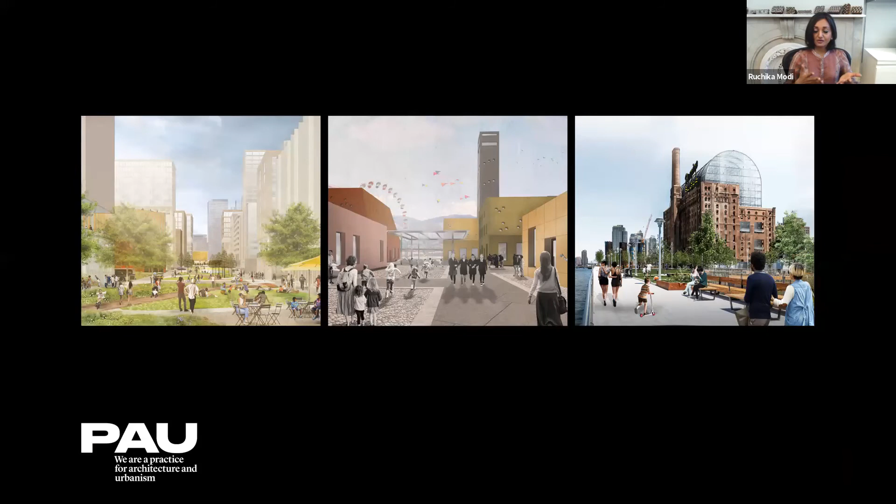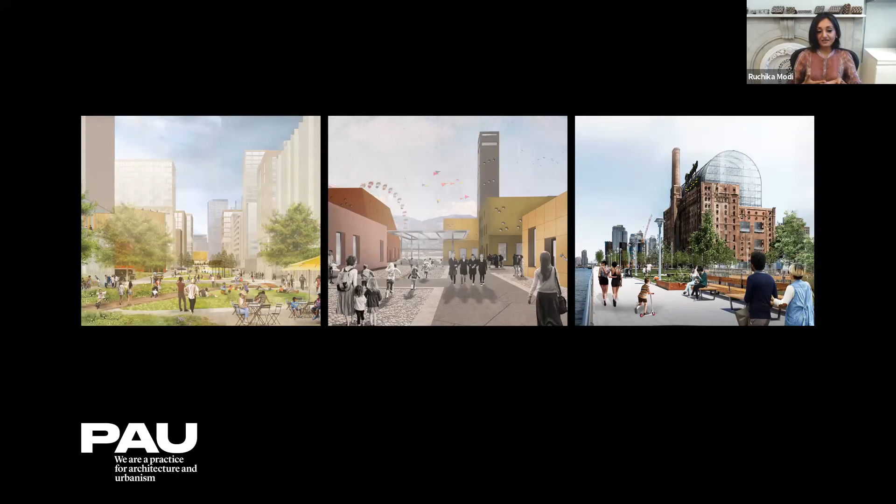So to conclude, I'm defending density not just for its more obvious benefits relating to responsible land use and resource conservation. But equally importantly, I'm putting a fine point on the right kind of density that also addresses the pressing socio-political issues of our era, from enabling equity and inclusion to inciting true democracy. These issues are spatial in nature, and what we do as architects, whether it's master planning neighborhoods or designing door thresholds, invariably makes a lasting impact on our society. Thank you.

Eric, I think you're muted. You're right, I've been doing this for six months now and I still do that every time. It's a global phenomenon.